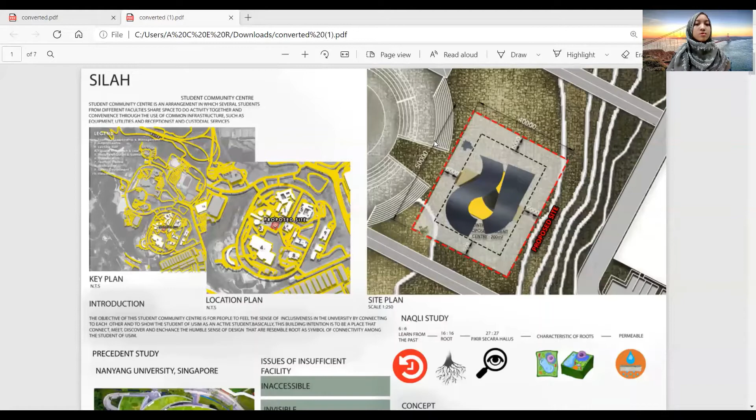The issues from this site are that the facilities inside USIM are inaccessible, invisible, crowded, and produce bad odor. The solution I got from this issue is that we need to build a flexible area, open social area, and green environmental area.

From this problem, I researched about Naqli study. We should learn from the past, from the history of the Muslims themselves, to be like Medina, which is a good community of Muslims. So we should know our roots. We are Muslim, so we need to think about it in detail.

I came up with the characteristic of the roots, which is permeable. So basically, a university is not only about the physical place, but about establishing a community. And the community is like roots that are able to connect the underground with above ground.

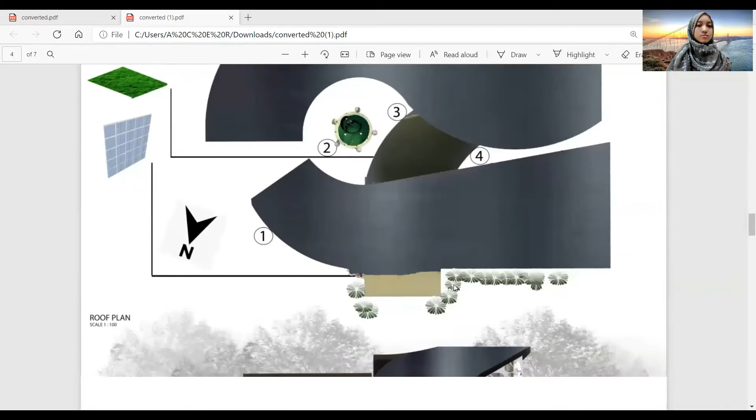For the design strategy, from the site synthesis, I found that the existing areas are FSU, FKP, and the amphitheater. So I built 3 entrances, and then, knowing the Qiblat direction, the Musalla should face the Qiblat.

The services area, so the cafe is allocated there, so that it is easy for the workers to throw out the rubbish and waste from the cafe itself. The toilets are also at the back of the building, which doesn't provide a good view, so it's good for the toilet to be there. And this is the Musalla.

From the sun path, I found that the north area is slightly hotter than the other side. As we can see from plants themselves, they bend when receiving light because they want to maximize the entrance of sunlight into the building.

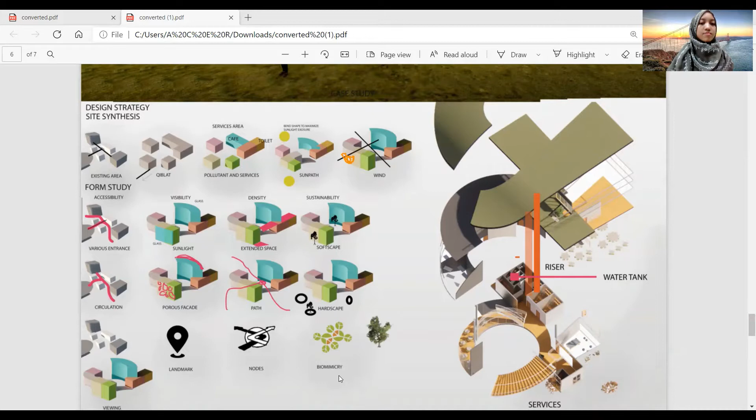As for the landmark, my building can also be a landmark, and my design also applies biomimicry design, which is like a twist like roots.

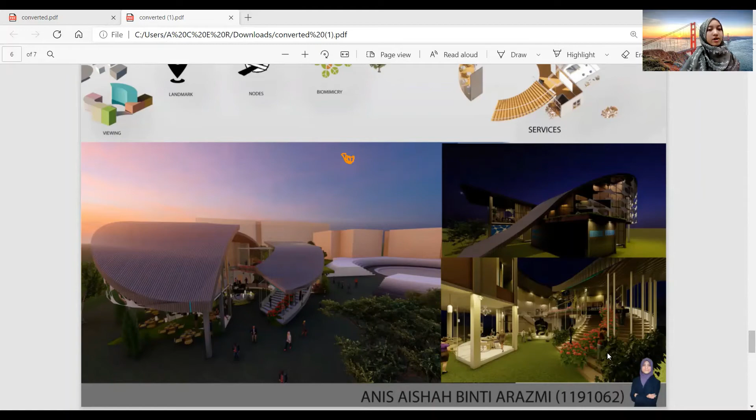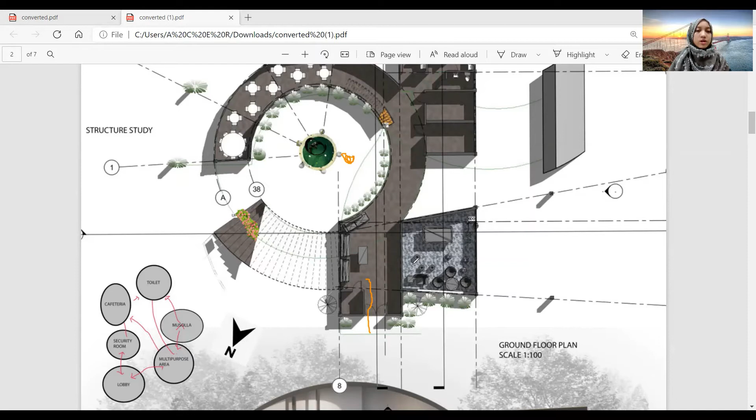This is the lobby and the lounge area. The function of the lounge area is so people, before they go to the multi-purpose area, if it's crowded inside, they can also sit at the lounge area.

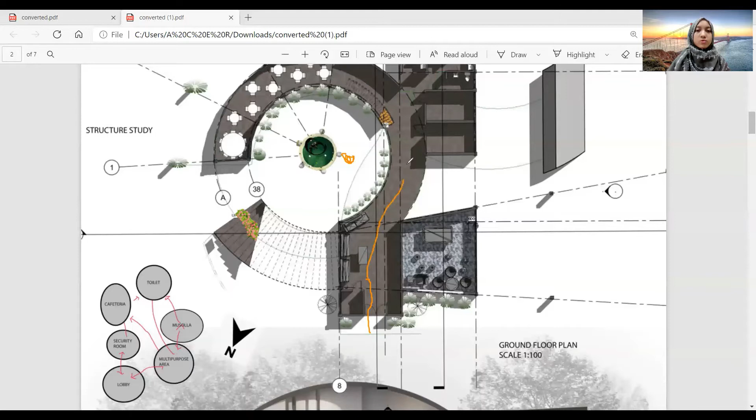And then as we go next, this is the toilets, and this is the musalla, and this is the toilets. I put the toilets and the musalla next to each other because people can take wudu from the toilets, and the musalla is located near every space.

For example, people from the multi-purpose area can pray here, and from the cafe also can pray here. And from above, they can go down here and go inside this building, so there is no problem with the musalla here.

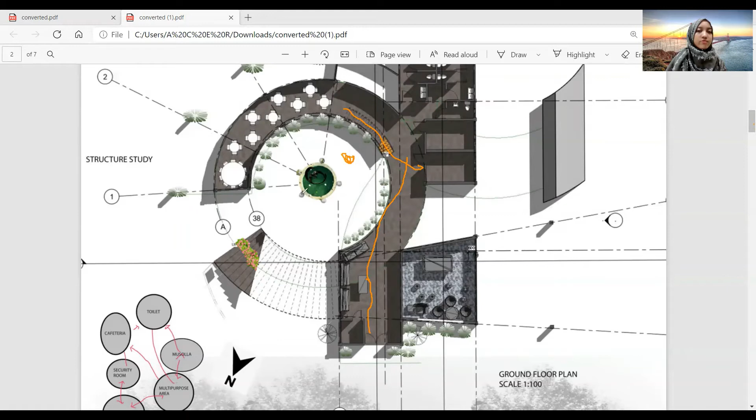I put the cafe at the curvy line of this building because the curved line shows more view, so people can also eat outside the building, since this building is a little bit cantilevered at the upstairs above. As we know, this cafe area is a crowded area.

People can also enjoy themselves at the center of this courtyard. This is the waterfall, and this is the sculpture. So when people come inside, they see a really unique structure and sculpture, which can attract people to come to this building.

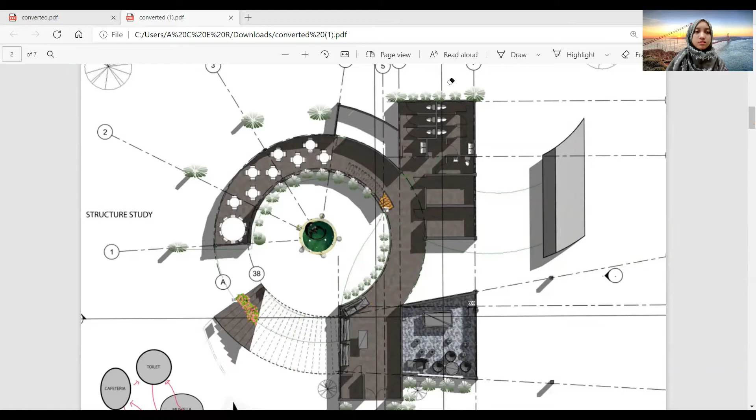This is the facade, as I mentioned. Why did I make it like a cell? Actually, it is like a cell, as I took from my concept the detail of the roots itself. So it's like a cell, and it acts as louvers.

This is the student study area and the computer area. Musalla, cafe. Alright.

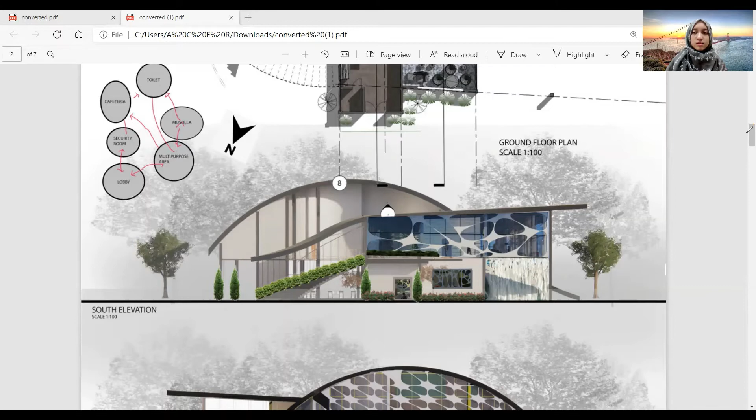This is from the south elevation. It's really wide here because the meeting area needs privacy and a good view, as they are having a really stressful day there, but we cannot make them more stressful, right? So we give a really wide space and a good view.

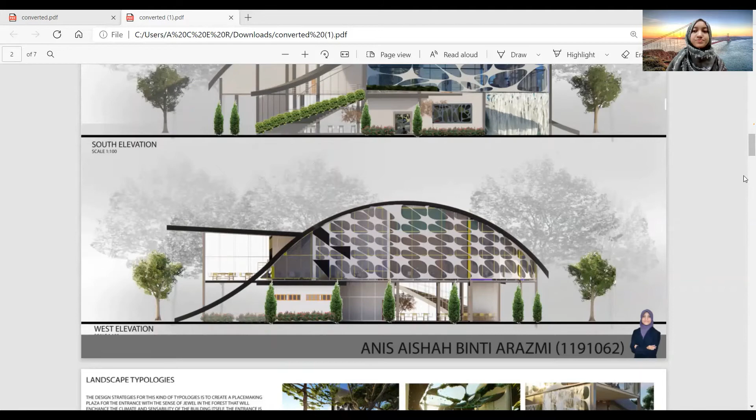Landscape typologies. The design strategy for this kind of typology is to create a placemaking plaza for the entrance with the sense of a jewel in the forest that will enhance the climate and sensibility of the building itself.

The entrance uses large and tall, high-trunk trees that will give a sense of humbleness and appreciation for nature. The user will experience low light from the ground that will enhance the tree and the sculpture at night.

Functionalism is the principle that buildings should be designed based solely on the purpose and function of the building. This principle is a matter of confusion and controversy within the profession, particularly in regard to modern architecture.

As we can see here, before they enter this building, there is a placemaking landscape structure to create a communal space for users to sit and wait there.

We also provide a green roof, creating a place with a perfect view and a communal space for users to experience, and a water feature landscape to enhance the element of water with the use of a waterfall here.

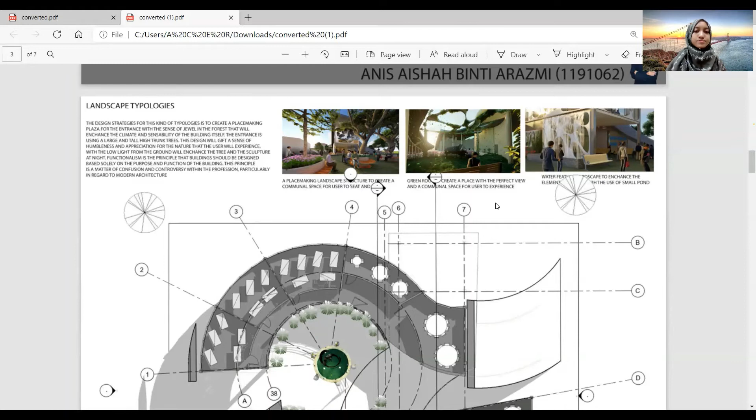This is the first floor plan. They can enter from this side, okay, and there's a void here.

Why did I make it a void? This building is a permeable design, so the people above can see what people are doing and their activities at the ground floor. So when they are entering, it actually provides a good place for them because there's a good view here.

This is the amphitheater and there's a waterfall here. So this place is really interesting and good for them to have a study group or more.

This place actually looks really wide because I made it with a folding door, so people can come outside, and if they are going into a serious mood, they will close up the sliding door, and then go here.

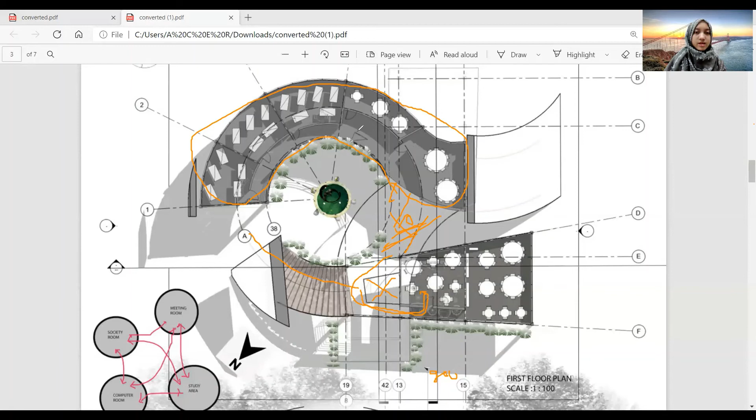Actually, there's a stair here. People from the ground can come out to this from these stairs. There are two stairs - this is the outside stair, this is the inside stair.

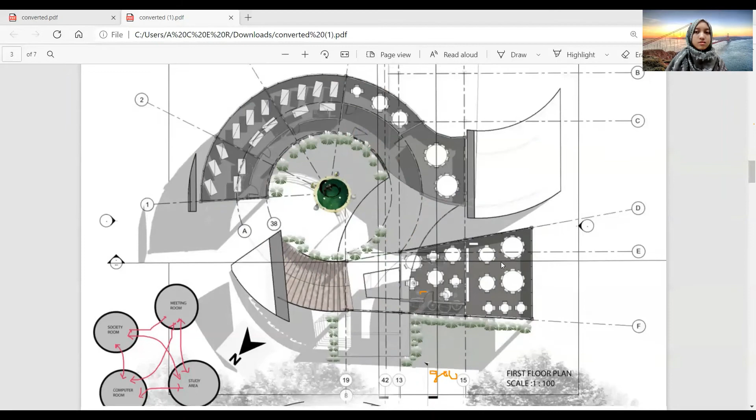And then we go for the section. This is the multi-purpose area, lunch area, the study area, and the computer room. And then this is the curvy line of this building. To us, it imitates the plants according to the sun. It's curvy.

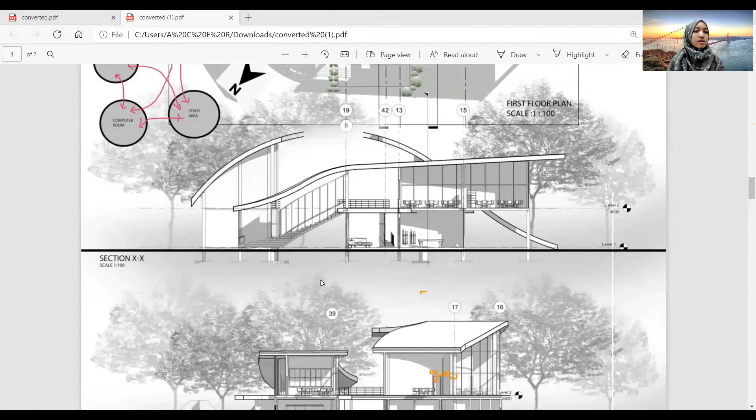And then this is the section X-X, which is they can come through from this and go here, or they can go here, and they also can go here. As we can see, there are many entrances from this section, so people freely can come inside and outside from this building. This is the toilets, and this is the musalla, which is located near to each other, as I mentioned before. And this is the meeting room.

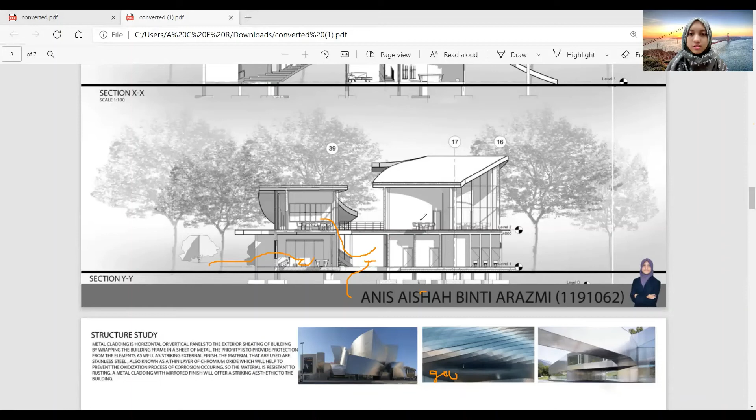The structure study, I use metal cladding. Metal cladding is horizontal or vertical panels to the exterior sheeting of building by wrapping the building frame in a sheet of metal. The priority is to provide protection from the elements as well as a striking external finish.

The material used is stainless steel, which is also known for having a thin layer of chromium oxide, which will help to prevent the oxidation process of corrosion occurring. The metal is resistant to rusting. A metal cladding with mirrored finish will offer a striking aesthetic to the building.

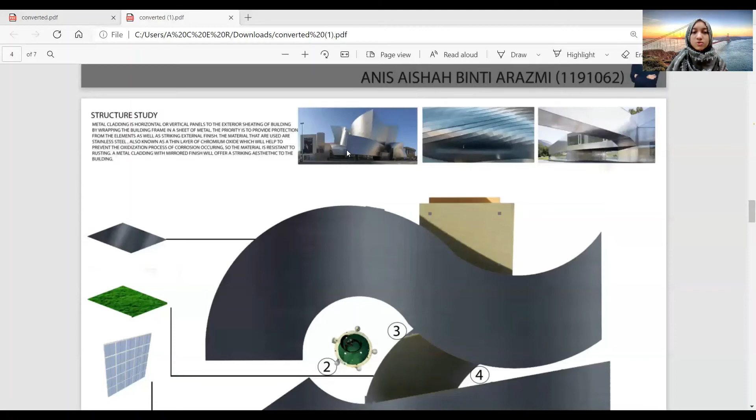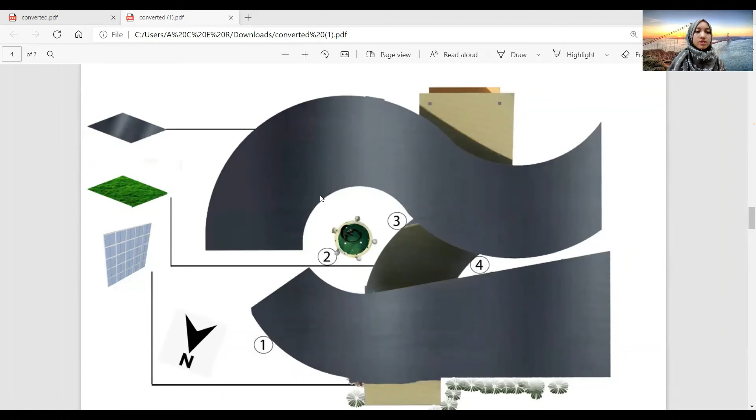This is from the front gallery. They use metal cladding - this is metal cladding. This is the roof. I use metal roof. Metal roof is really good because they are really good in recycling. This is the green roof, and this is I use glass wall panels.

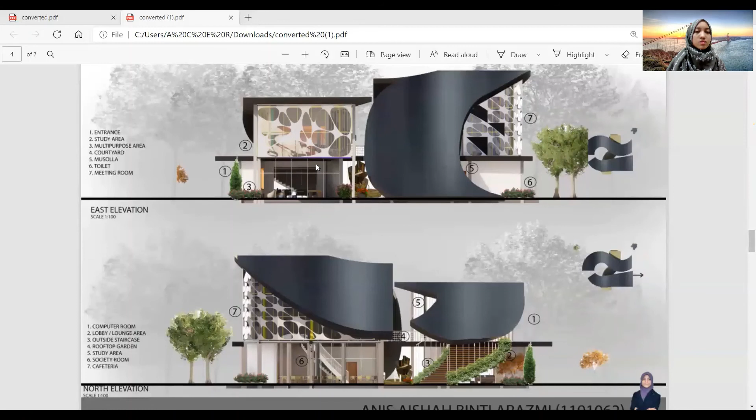This is the elevation. The entrance, study area, multipurpose area, courtyard. This is the courtyard entrance. This is the facade that I mentioned, which we use the concept from the concept itself. This is from the north elevation.

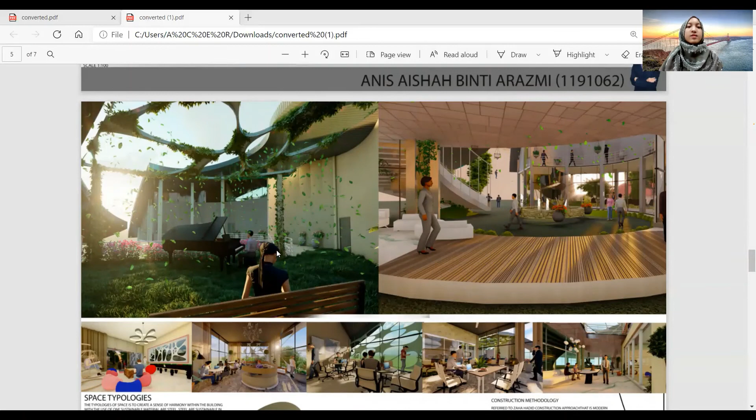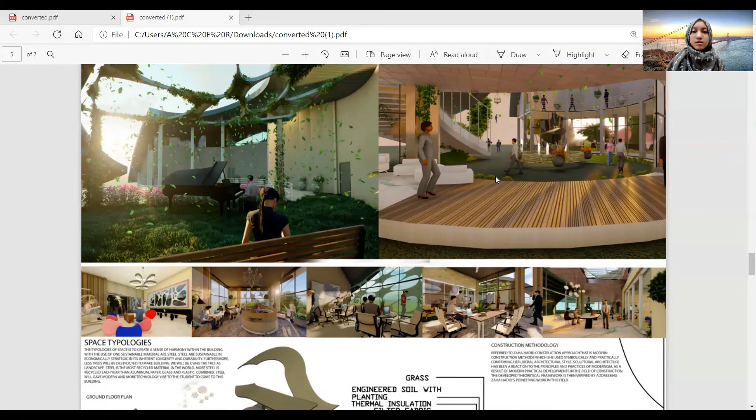This is a sneak peek of the interior of this building. As we can see here, some people are having fun by playing music that will provide a good vibe in this building. And then this is the sculpture, so people can appreciate the sculpture when they are going inside of this building. This is the multi-purpose area and the study area, meeting area, computer room, and the lounge.

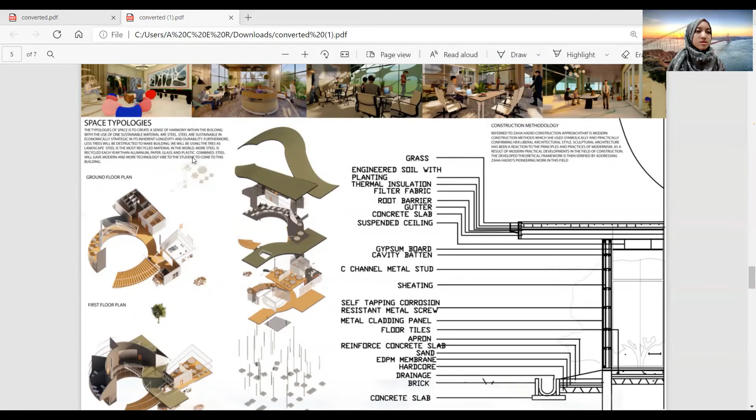Okay, and then the space typologies. The typologies of space is to create a sense of harmony within the building with the use of one sustainable material that is steel, sustainable, economically strategic, in its inherent longevity and durability. Furthermore, fewer trees will be sacrificed to make the building.

So the typologies of space create a harmony within the building with the use of one of the sustainable materials that are steel, sustainable, economically strategic, in its inherent longevity and durability. Furthermore, fewer trees will be sacrificed to make the building. So we will use trees as landscape, and steel is the most recycled material in the world. More steel is recycled each year than aluminum, paper, glass, and plastic combined. Steel will give a modern and more technological vibe to the students coming to this building.

The construction methodology refers to Zaha Hadid's construction approach, modern construction methods which she used symbolically and practically, confirming her liberal architectural style. Sculptural architecture has been a reaction to the principles and practice of modernism as a result of modern practical development in the field of construction. The developed theoretical framework is then verified by addressing Zaha Hadid's pioneering work in this field.

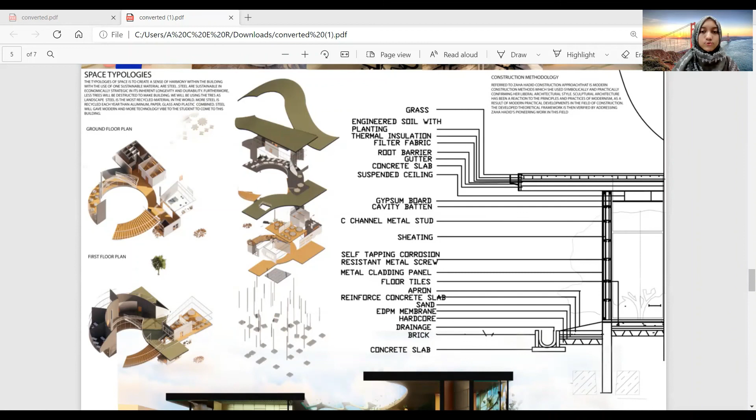So the construction that I make is the grass, the green roof, and the metal wall. This is the detail of this wall, with the green roof filled with grass, engineered soil with planting, thermal insulation, filter fabric, and root barrier, and so on.

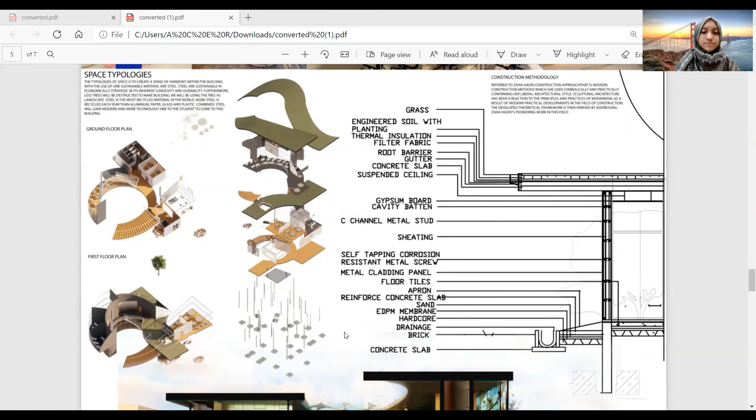This is the sectional detail of this building. As we can see, there is the computer room here, the courtyard here, the rooftop here, and the meeting room here.